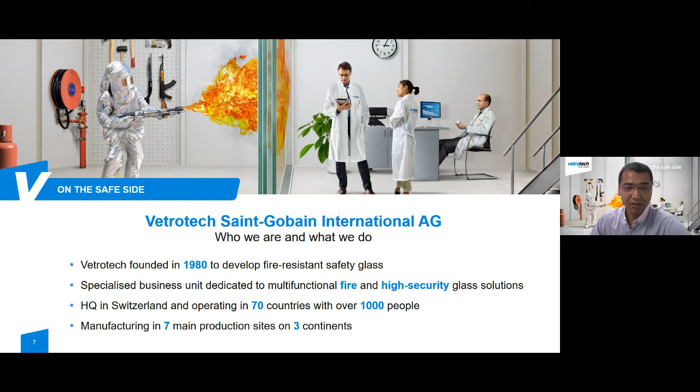About myself now, let me introduce myself. My name is Martin Vaux. I started my career in fire building safety regulation as a building control officer. I joined Vetrotech Saint-Gobain in 2002 as a technician for the French market in charge of fire development and prescription with architects and stakeholders. In 2021, I became the fire protection expert for Vetrotech Saint-Gobain at the international level. I have a vast knowledge in fire building regulation, fire standards, fire safety, fire certification, and I also have expertise in fire safety engineering and project management.

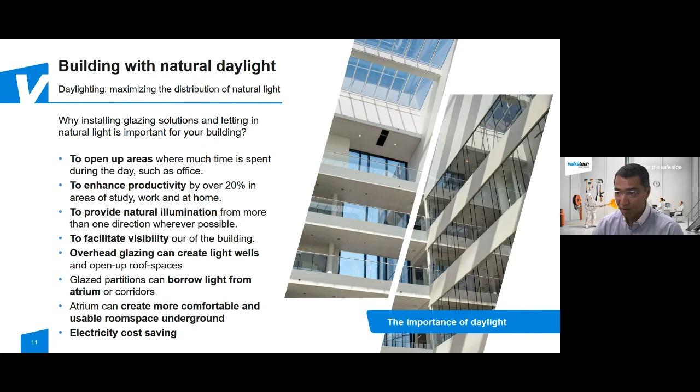Let's jump now to the architectural benefits of fire-resistant glass. The aim of most architects is to create a building with a feeling of well-being, as most people spend much of the day in buildings, either at work, at home, or at school, for example. The quality of the light in their surroundings has a considerable implication on their safety, health, state of mind, and even their efficiency. In the following bullet points, a few examples of the assets of natural daylight coming through the building. For instance, you have productivity over 20%, the visibility through the building wherever you are, and also electricity cost savings, with natural daylight reducing the amount of electricity that you spend during the day.

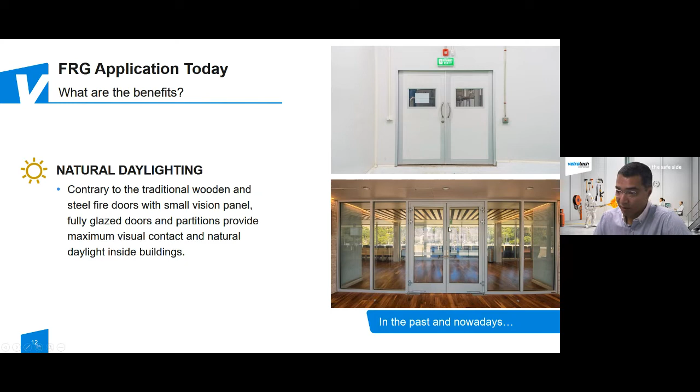Based on fire building regulations, each level of the building must have several compartments surrounded and protected by fire partition walls and fire doors to avoid the spread of fire. In the past, fire partitions were made mainly with concrete or drywall, and fire doors made of wood or steel with sometimes a small glass panel, as you can see here. Nowadays, with the improvement of fire-resistant glass performance and capability, we are now able to let natural daylight get into these compartments without compromising fire safety. Here is an example of what was done in the past and what we are now able to do. And you see here clearly the daylight passing through from the facade to the other part of this fire-rated protection.

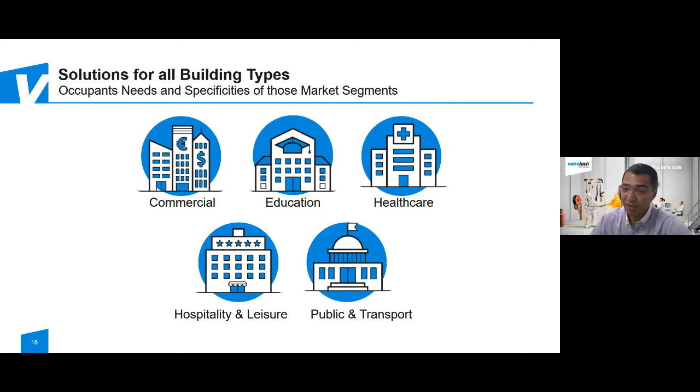We have a solution for all these market segments: commercial, education, healthcare, hospitality, leisure, public and transport. Natural daylight combined with fire-resistant glass is possible whatever the complexity of your project. Here you have some examples of what kind of application we are able to put on the building side, allowing the natural daylight to get into it, together with the fire protection required.

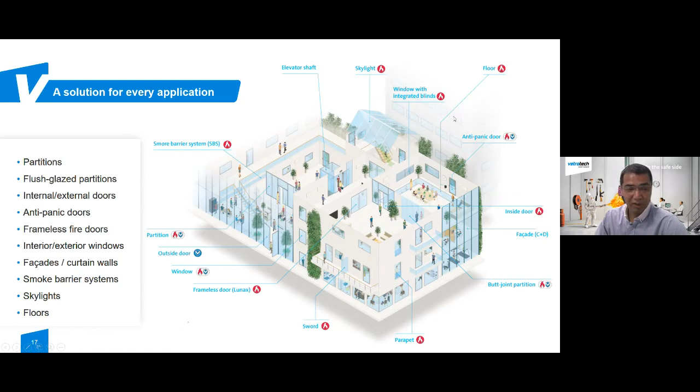How can we now choose the correct fire-resistant glass? This is related to the fire building regulation, of course, and the following criteria. You have the fire-resistant performance, which is E, EW, and EI, together with the fire-resistant duration from 30 minutes to 120 minutes; the type of application, so a door, a partition wall, a curtain wall, for instance; the condition where you will use it, outside as a facade or inside for a partition or a door; and any additional characteristics needed or wished by the architect: sound reduction, design, U-value, thermal insulation for outside, for instance.

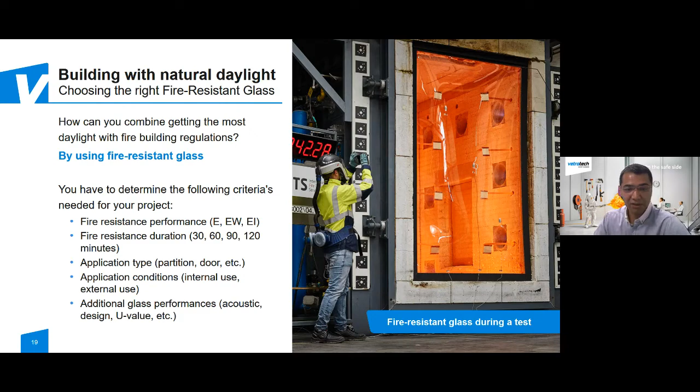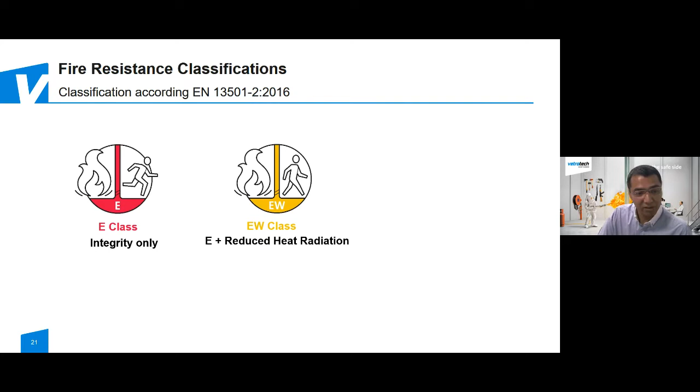Let's talk about fire resistance now and classification. So according to the EN standards, there are three kinds of classification. You have first the E class, which is integrity only. Then you have the EW class, which combines integrity with the reduction of heat radiation. Then at the end, you have the EI class, which combines integrity with thermal insulation.

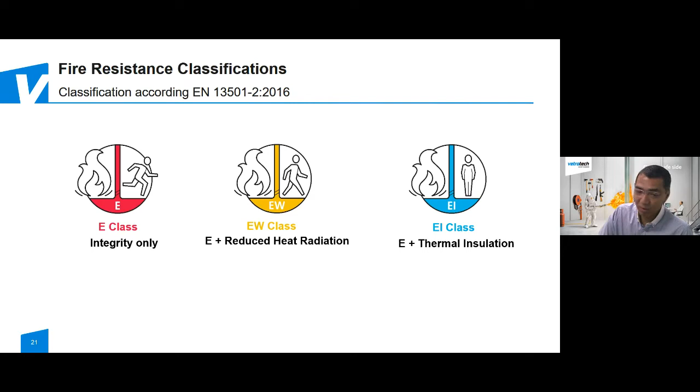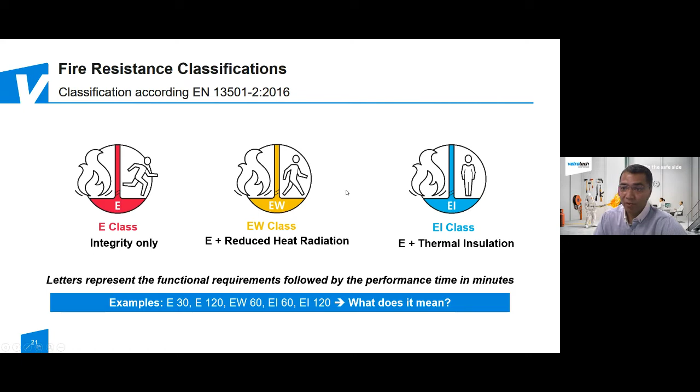These classification performances are combined with the fire performance duration. Here are some examples of possible combinations. E30, integrity with 30-minute duration. E120, integrity with 120-minute duration. EW60, EI60, and EI120. So this classification will be related to the fire building regulation requirements in your country.

Now, in detail, the definition of each performance. For E classification, it is the ability of an element to withstand fire exposure only from one side without the transmission of fire to the unexposed side as a result of the passage of flame or hot gases. For the EW classification, it is the ability of an element to withstand fire exposure only on one side with the E criteria, and also to measure the heat radiation on the unexposed side, which shall be lower than 15 kilowatts per square meter.

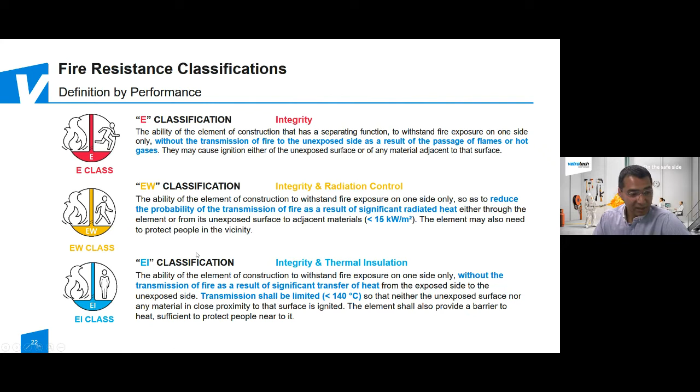And now for EI classification, it is the ability of an element to withstand fire exposure only from one side with the E criteria, and also the measure of the heat transfer to the unexposed side, with a limit of maximum 140 Celsius on the unexposed side.

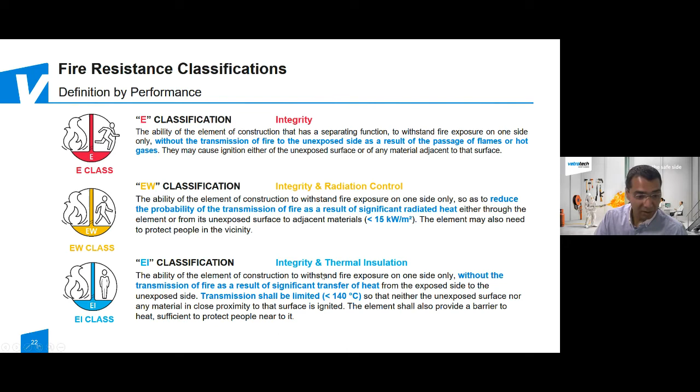Now you will see a short movie of the reaction of the E30 glass and an EI30 glass, so you can see the meaning and the behavior of both classifications. These two fire tests are conducted according to the EN test method following the fire ISO curve 834, where we have about 840 Celsius at 30-minute duration.

So let's start with the E30 glass. It is a 6 mm toughened safety glass which protects from the flame and the hot gases passing through. So here you can see the deflection of the glass during the fire test. All the heat is passing through. You can see inside the furnace, so you can imagine on the unexposed side how much can be the heat. And here at the end of this duration of 30 minutes, there is no flame passing through, nor hot gases either, which went to the unexposed side.

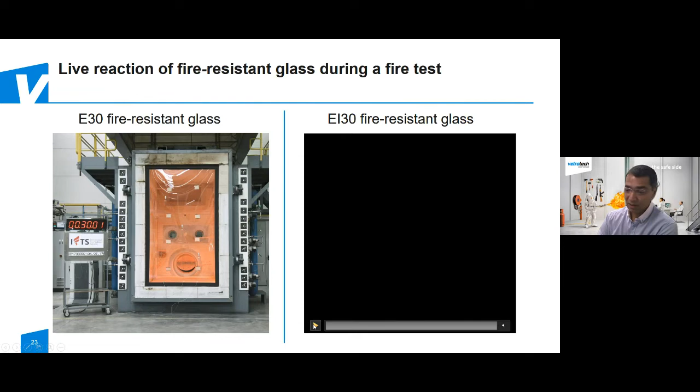Let's jump to the EI30 fire test. It's a 16 mm laminated safety glass with some interlayer inside. So you have first the reaction and the behavior of the glass on the fire side, which detaches from the interlayer, breaks down and falls into the furnace.

And then during the whole test, the interlayer, which was transparent before the reaction, became white and now gets totally opaque and generates a block of heat transfer during the whole duration of the test for 30 minutes. So at the opposite of the fire, on the unexposed side, everywhere here on the glass surface, there will be a temperature less than 140 Celsius.

And now, if we have a look at the two pictures, you can easily recognize the main difference. Here, the glass will let the heat pass through, and here you see there is no heat transfer from the exposed side to the unexposed side. The visual barrier that we have here also prevents any panic during the evacuation of the people in case of fire. The people will not be afraid of fire during the evacuation.

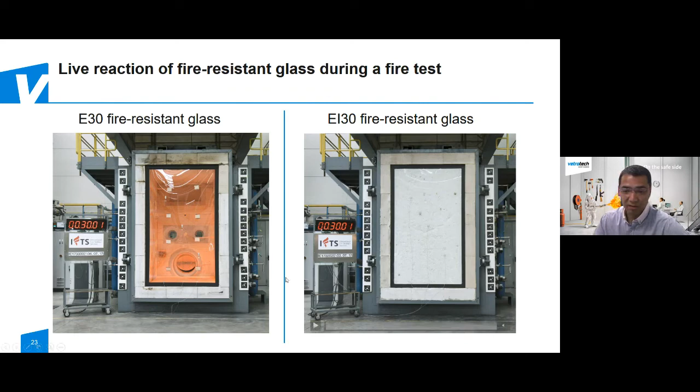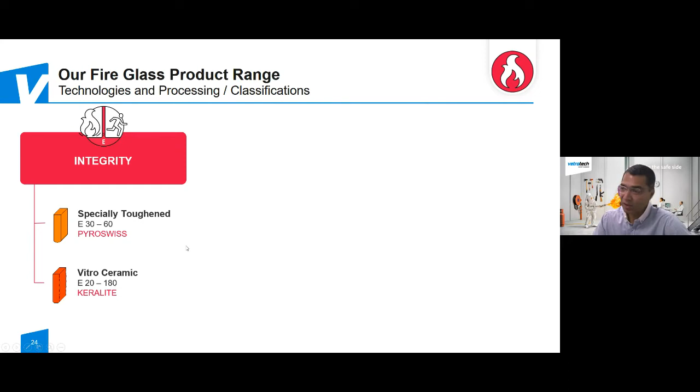So, a little view in our glass product range. For the integrity performance, we have two products. The first one, which is called Pyroswiss, which is a toughened safety glass for the classification from E30 to E60. We have another product called Keralite, which is a vitro-ceramic glass for the performance from E20 to E180. This glass is dedicated to the US market and to the Middle East market, because this glass can withstand another criteria of performance, which is the hose stream test at the end of the fire test.

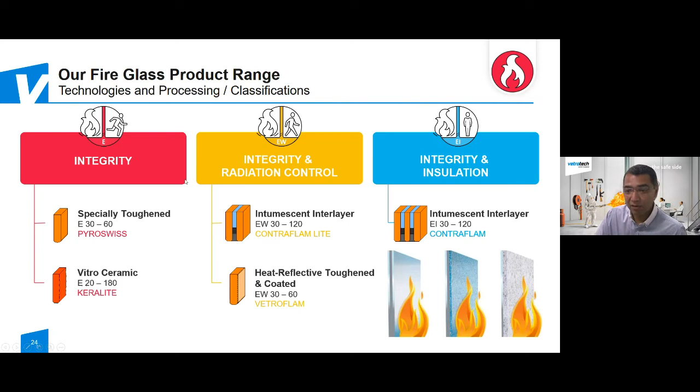When the fire appears, the glass on the fire side exposure will detach, crack, break, and fall down into the furnace, and then our interlayer will react during the whole fire test to generate a barrier to prevent the heat transfer during the whole duration required by the fire building regulation.

Our glass is not only fire protection glass. Our glass has many assets. We are able to produce big glass sizes from 2.3 meters to 4.6 meters in one piece. So you can imagine how big the glass can be. We have also the multifunctionality, such as the safety, which protects against hurt and falling down. We have the sustainability, because our glass is based on recycled glass, and also we reduce our footprint.

Our glass can also be combined with comfort. We can add blinds into our IGU product. We can also put coating on our glass to get a really low U value, and also provide sound reduction and thermal insulation. And especially for the architect, we have design glass, tinted glass, screen printing of our glass, and also film color, and also privacy that we can have on the building offices. All this together gives customized solutions for whatever needs you have in your project.